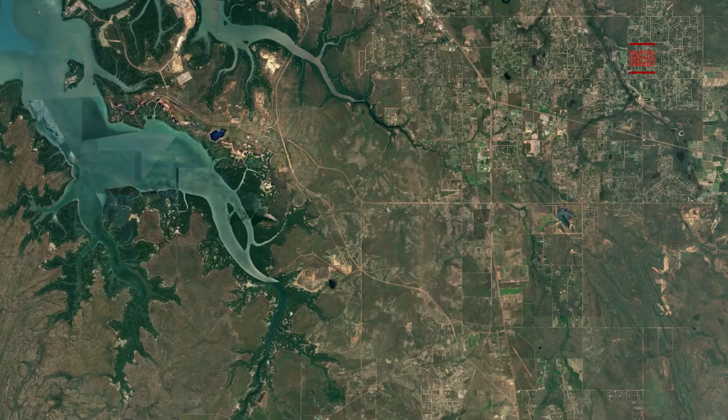Now, we know that burning fossil fuels, which is a part of our daily life, is changing the Earth's climate. And with the extensive failures of governments to act on climate change, we are here to light a candle, a candle that will show the way to sustainability. I present to you Weddell Green City.

As the population in the Greater Darwin region grows, the urban areas of Darwin and Palmerston are almost fully developed due to the construction of apartments, units, and townhouses. The land remaining for suburban development is limited. Although there are large amounts of land available around the Darwin region, it is not suitable for residential or commercial purposes, as much of the land is affected by constraints such as seasonal waterlogging, flooding, and biting insects.

The location of Weddell provides opportunities for developing both residential and commercial areas, along with beautiful views, access to rivers on the eastern and western sides, an existing rail line for freight, and proximity to the cities of Darwin and Palmerston.

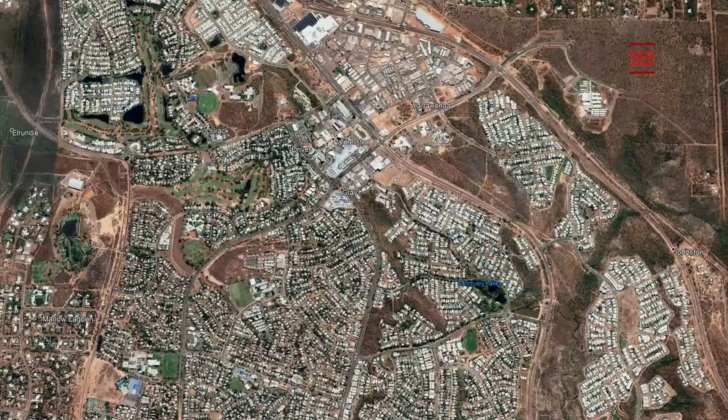Weddell is a part of the Litchfield sub-region and lies roughly 40 kilometers southeast of the city of Darwin and 19 kilometers south of the city of Palmerston. There are two nearby rural activity centers, which are respectively Berry Springs at the south and Humpty Doo at the east.

It is located in a stony plain area at the fork between two rivers, Elizabeth River from the north and east, and the Blackmore River from the west. Other boundaries here include the Stuart Highway at the east and the Cox Peninsula Road at the south.

For biodiversity, as part of the Darwin coastal region, there are 48 nationally listed threatened species and over 80 territorially listed threatened species in Weddell. The wetlands, savanna, and monsoon forests cultivated by the rivers provide large areas of high-grade habitats throughout the land. At the riverbank, mangroves provide breeding habitats for a wide range of fish, birds, and crustaceans. The rich biodiversity here also means that there are a lot of species to be preserved.

This includes, for example, the yellow-spotted monitor, the black-footed tree rat, and a few kinds of migratory shorebirds.

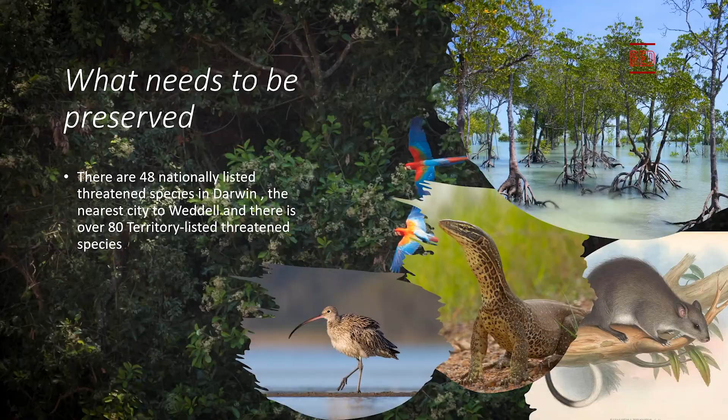In order to help develop the new city of Weddell as a model of sustainability for other cities, we have defined certain targets that address the various components of the Weddell system. Energy from renewables will power public commercial sites, parks, shopping centers, office buildings, and supply electricity to homes. Excess energy will be stored and what's left will be exported to the grid.

Buildings and transport are the largest contributors to greenhouse gas emissions in cities. Our design will focus on minimizing their impact and achieving carbon neutrality in individual systems within the city. Waste is often the third largest source of emissions in cities. Use of smart technology for waste segregation at source and policies to incentivize and support recycling, such as fines and waste levies on businesses, is expected to reduce waste going into landfill.

The use of extensive greenery and vegetation along with evaporative cooling systems is expected to keep temperatures under control. The provision of local services and quality facilities such as schools, sports centers, community health services will minimize the need for intercity travel, lowering emissions and congestion in the region.

The design of the public transport system in Weddell will focus on making it fast, frequent, and safe, with minimized walking distances from high-density residential and commercial areas. A large industrial area with proximity to the Adelaide to Darwin freight rail line, access to water from the Blackmore River, offers an attractive location for setting up industry and creating job opportunities.

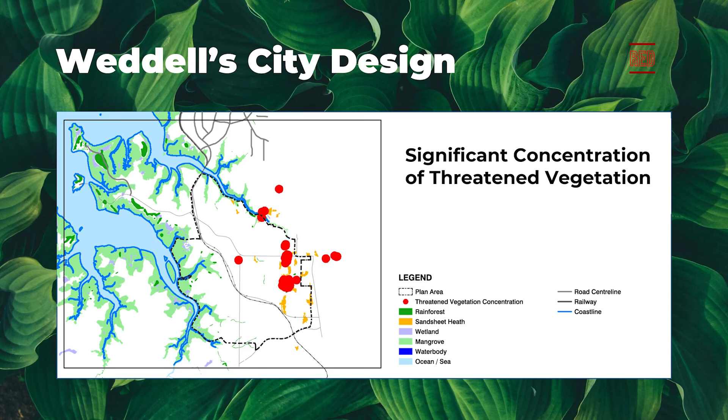Designation of land use can be one of the trickiest tasks in designing the city. This map shows the concentration of threatened vegetation in the region of Weddell, and we don't want to build our city on that area. And this map shows the acid sulfate soils, which can affect the agriculture and landscaping. And also you don't want your street to look like this.

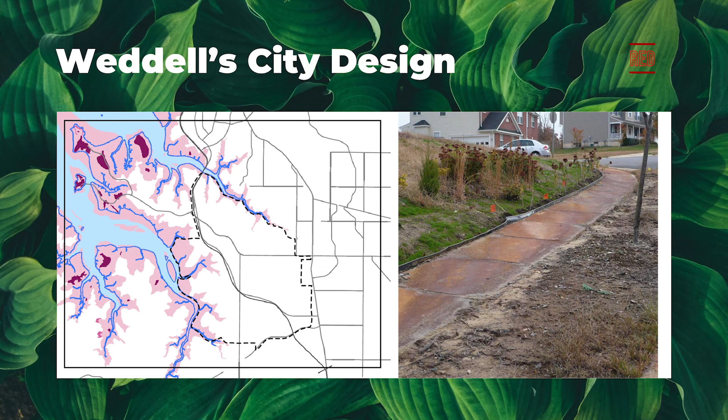With all this in mind, we come up with this plan. Then, building on this plan, we come up with a final draft of the city plan. Let's look it up close.

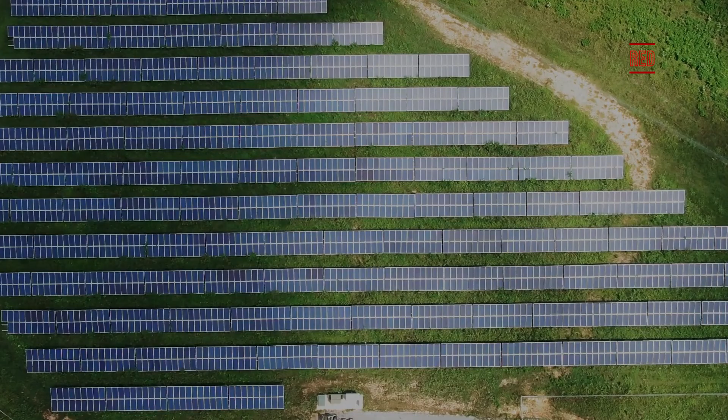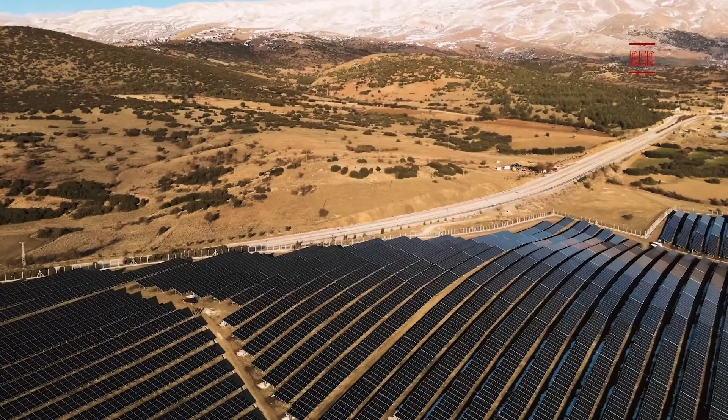In order to meet the sustainability targets mentioned above, we propose the following solutions. Weddell lies in a region of abundant solar resources. The Northern Territory receives the highest amounts of annual solar exposure compared to any other state in Australia. The relatively flat land, minimal shading, and sufficient area make Weddell a suitable site for solar farms.

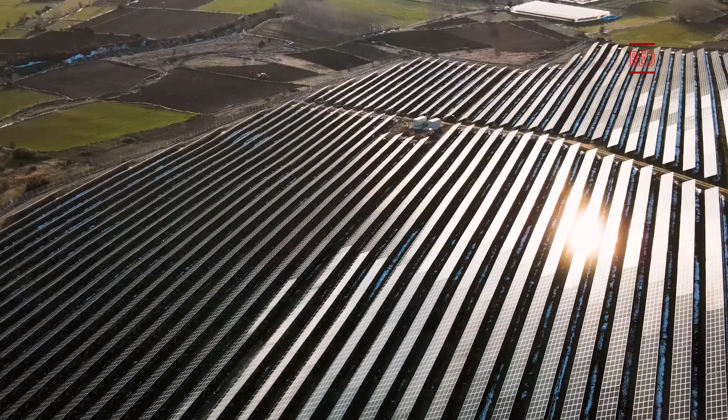In order to meet the energy requirements of the city in a sustainable way, we propose a scalable solar farm of up to 50 megawatts to supply energy to over 14,000 households. Excess energy will be stored in batteries and a low-head pumped hydro storage system, or PHES. The remaining energy will be exported to the grid.

The solar farm will use environmentally friendly thin-film PV panels that offer better performance in hotter climates, feeding excess energy into utility-scale lithium batteries. The pumped hydro system will pump water at an artificially elevated reservoir close to the Elizabeth River Bridge. Energy from the hydro storage location and lithium batteries will be used to supply the city at times of low solar production and after sunset.

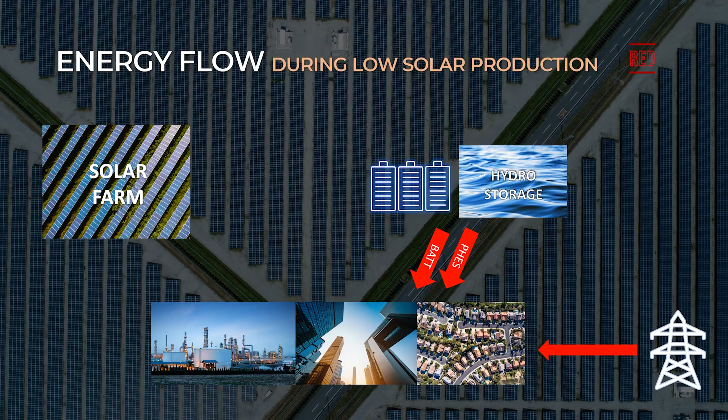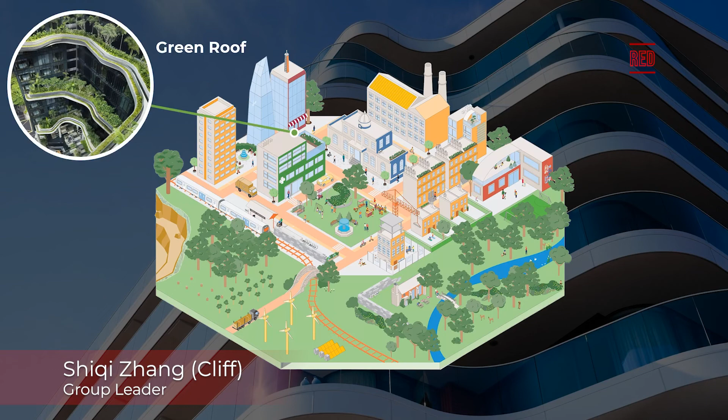So for the built environment of Weddell, here I will go through 4 key designs: the green roof, the building integrated photovoltaics, the kinetic pavements, and the passive designs.

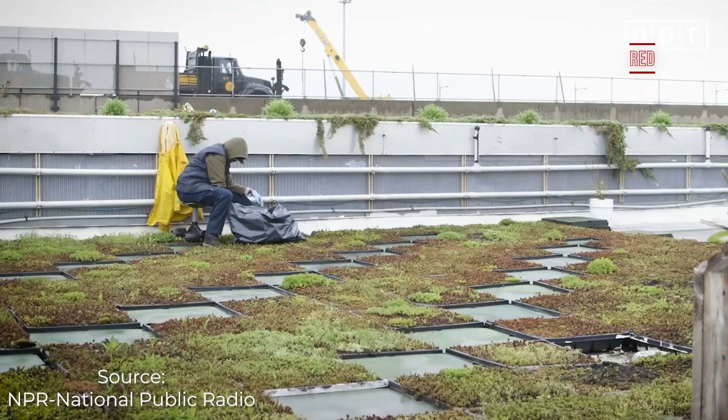The green roof is to cover the roof partially or completely with vegetation planted on growing mediums over a waterproofing membrane, but it might also have irrigation and drainage systems or other additional roof barriers. In terms of water, it can absorb and collect rainwater and reduce stormwater runoff to avoid flooding in the wet season. In terms of living comfort, it could be a thermal and sound insulation layer to help control room temperature in summer and keep the noise out.

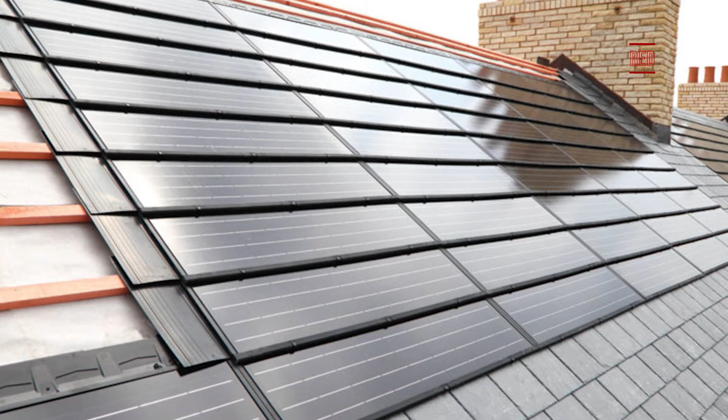The building integrated photovoltaic system is to use PV materials to replace traditional building materials in the building envelope, such as at the roof, skylights, or facades. To further utilize the abundant solar energy in Weddell, we believe applying this system in urban areas is an eco-friendly and cost-effective energy solution to the city.

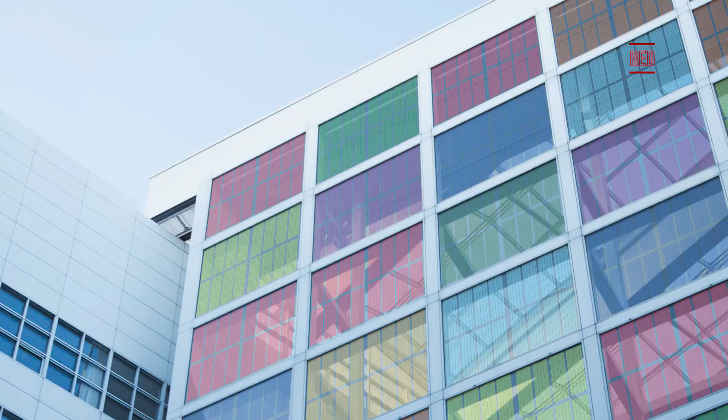The kinetic pavements. Installing these special pavements in busy commercial areas of Weddell can help reduce the electricity extracted from the power grid and achieve power self-sufficiency for most of the streetlights and signages.

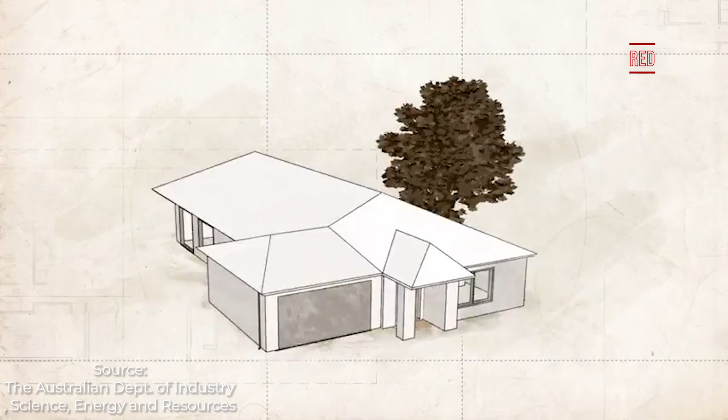Passive design is a design that takes advantage of the climate, maintaining a comfortable temperature range in the home. The passive design could also work together with the green roof, BIPV, and solar water heating system. A mix of passive design strategies will achieve better performance on both living comfort and sustainability.

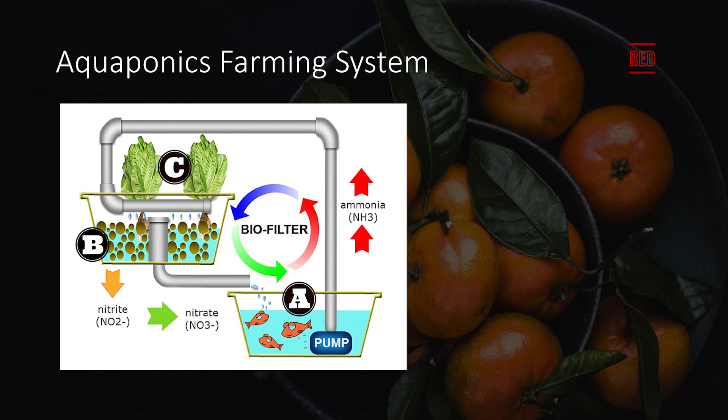With the increase of population, traditional open field farming is no longer sufficient to meet current needs, so we also consider aquaponics farming. This is a method that combines the advantages of aquaculture and hydroponics. The waste produced by fish can be transformed by bacteria and generate organic nutrients for vegetables. The water is filtered through the veggie area and then recycled back to the fish tank for reuse. Compared with traditional agriculture, the water consumption of this system is reduced by 90%, which is sustainable and environmentally friendly.

Weddell will feature a compact, high-density design. The layout of the city will allow residents to reach key service areas on foot, with an abundance of open community spaces, gardens, and parklands. Natural and artificial shade due to building frontage designs will make walking an attractive and healthy option. Quiet and efficient battery-based electric buses for inner-city travel and the use of a bus rapid transit system for connections...

...to Palmerston and Darwin offer an attractive alternative to private transport. Use of an intelligent traffic lighting system and introduction of a road congestion tax have both been shown to reduce peak hour traffic in other cities around the world.

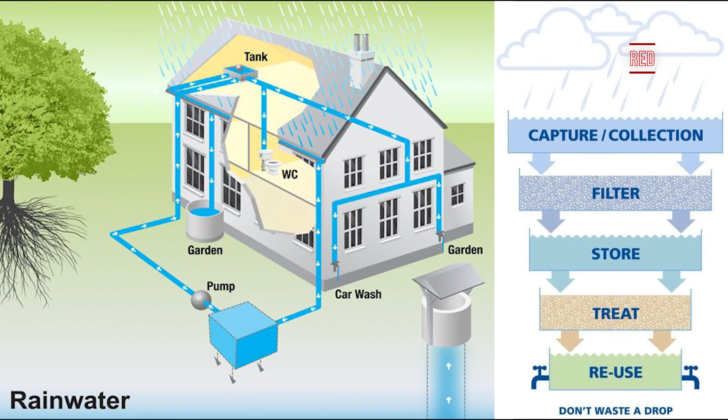For our solution, we propose a rainwater harvester system to collect rainwater. The design of the roof makes it easy to collect the rainwater. It filters out impurities such as mud and sand, and stores it in a large tank. This can be used in toilets in public facilities. Also, it can be treated by technologies like activated carbon to meet the standard of drinking or washing level.

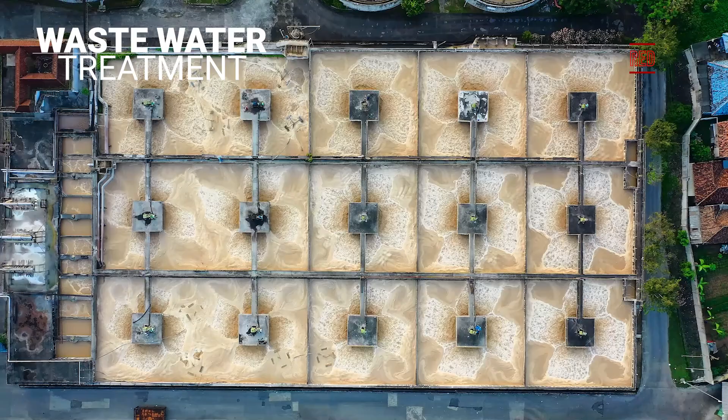For wastewater treatment, we use the principle of anaerobic digestion combined with thermal hydrolysis. This process significantly reduces the quantity of biosolids produced to create better quality products, leading to potential cost savings for utilities.

According to the Australian Bureau of Statistics, only 60% of solid waste in Australia is recovered, and the other 40%, yes, you guessed it, goes to landfill. In Weddell, we will not have a landfill, or at least not for the municipal solid waste, but maybe for the byproduct of the gasification plant.

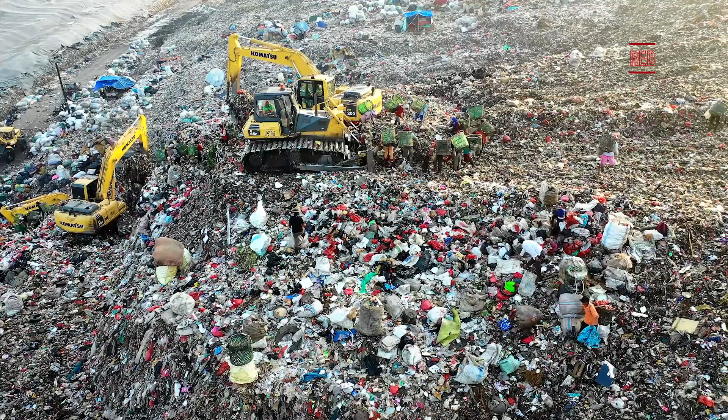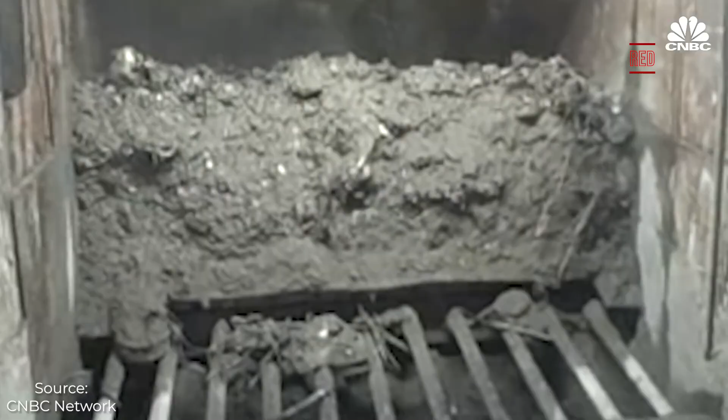All unsorted municipal solid waste will be used as fuel and raw material for Weddell's gasification plant. In the gasification plant, waste will not be combusted, meaning no toxic ashes are produced. Instead, a highly controlled amount of oxygen and steam reacts with the waste, turning it into a mixture of carbon monoxide, hydrogen, and other elements.

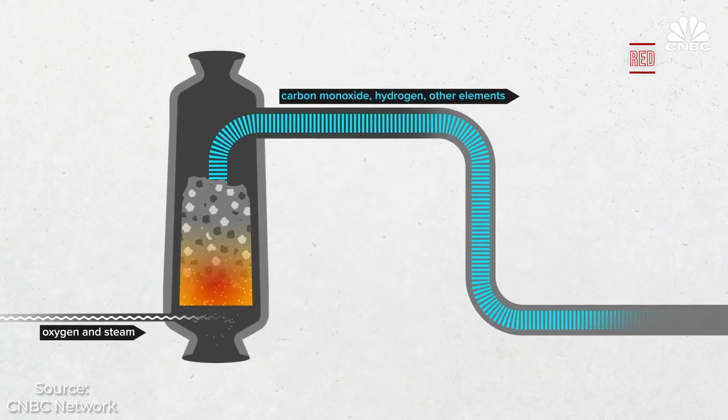This synthetic gas can then be converted into high-value products, like hydrogen fuel, ethanol, or even diesel. 20% of the energy created by the gasification plant will be used to run the plant itself, making it carbon neutral or maybe carbon negative compared to landfill.

For sorted waste, whether it's commercial and industrial waste or construction and demolition waste, recycling is the solution, because this not only induces the sustainability of Weddell, but also creates a profit-generating industry for the city.

In conclusion, our concept of Weddell is not a fantasy nor a dream. It is a viable solution that can future-proof Weddell to be a model of sustainability and a world-class green city.